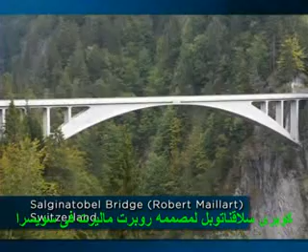Now, having said that, I should add that today's near universal use of science-based methods hasn't diminished the importance of experience in engineering design. Many of the modern era's greatest structures, for example, Robert Maillart's beautiful Salginatobel Bridge in Switzerland, used fundamentally empirical design approaches that were informed by scientific principles, but they were really guided by experience, by observation, and by experimentation.

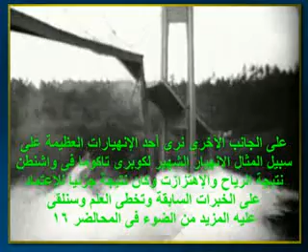And on the other hand, some of our greatest failures, for example, the infamous collapse of the Tacoma Narrows Bridge in Washington State due to wind-induced vibration, resulted, at least in part, from over-reliance on science and inadequate attention to past experience. We'll look more at this case in Lecture 16. Still, engineering as we know it today simply couldn't be performed without science.

And just as scientific principles are vitally important tools for modern engineers in practice, so these principles are also a vitally important component of this course. There are 3 reasons why it's worth your time to invest in learning the science of structures, and more specifically the science called engineering mechanics. First, science provides a sort of a shortcut to understanding.

If we wanted to learn how columns work, one approach might be to build a whole lot of columns, hundreds of columns, and then take them into the laboratory and test each one and observe how it behaves under load. Observe how differing geometry and differing materials affect the strength of those columns. And then based on all that data, try to generalize some sort of overall conclusions about how columns work. That's one approach. Or we could glean the same level of understanding from a 15-minute introduction to basic scientific principles governing column behavior. Given our short time together, I think we'll adopt the latter approach.

Second, science provides universality. As engineers of the empirical era knew well, experience really only equips us to understand structures that are more or less similar to the ones we've seen before. But an understanding of scientific principles allows us to understand and even to design any structure, even if we have no experience with that structure previously. And this is true even for the empirically designed structures of the ancient, medieval, and Renaissance eras, because the science is always there, manifested in the actual behavior of the physical structure.

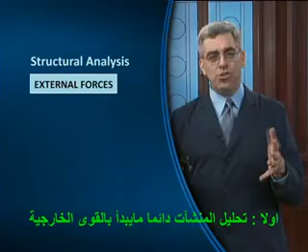Our roadmap shows the major concepts that are involved in the analysis of a structure. Let's build it a step at a time. First, structural analysis always begins with external forces. And external forces come in two flavors, loads and reactions. Let's use a physical model of the Chouteau Bridge to give these concepts a little bit more physical meaning. Here's our model of the Chouteau Bridge. And the actual railroad bridge structure experiences two principal kinds of loads. They're called dead load and live load.

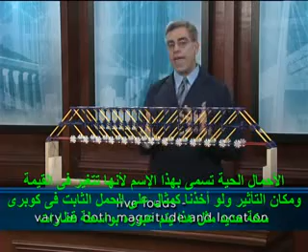Dead load is load that is permanent and unchanging, and the most important type of dead load is the self-weight of the structure, its own mass. Live loads are called live loads because they vary in both magnitude and location. So typical examples of live load for a railroad bridge like this would be the weight of heavy trains crossing the span, as well as a variety of different kinds of environmental forces. For example, when the wind blows on the side of the bridge, it exerts pressure that constitutes wind loading.

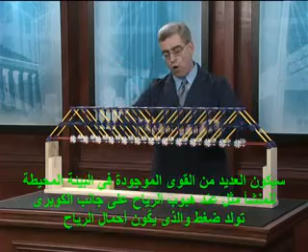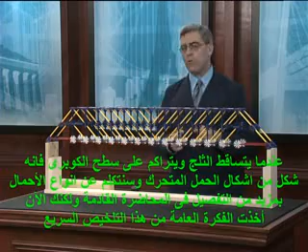When snow falls and accumulates on the deck of the bridge, it adds weight, which is another form of live load. We'll be talking about loads much more comprehensively in a later lecture, but you get the general idea from this quick summary.

Now, my physical model bridge happens to weigh 2 pounds, so that's the dead load associated with this structure. And to simulate the live load of a locomotive crossing the span, I'm going to take this steel weight, which weighs 3 pounds, and I'm going to hang it precisely in the middle of the bridge at mid-span. Okay? So those are loads.

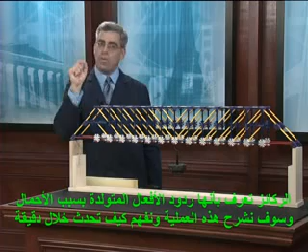The second type of external force is the reaction, and a reaction is defined as a force that's developed at a support in response to those applied loads. A support is just a physical connection between the structure and its physical surroundings, its foundations. So the supports are located right here at this point and at the equivalent point on the opposite end of the bridge. It's important to recognize that reactions are caused by loads. We're going to explore this process and understand how it happens in just a minute.

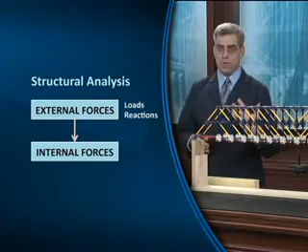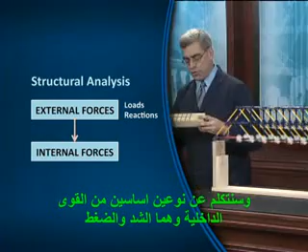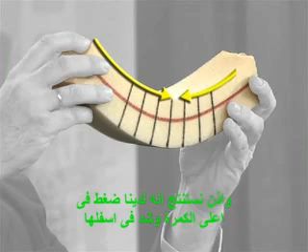What you can see, though, is that when I apply load to the bridge, it does bend downward slightly. It bends downward. It turns out that a truss is very similar to a beam. And you can see that when I bend this beam, both compression and tension are occurring within the beam. When I bend the beam, the top surface gets a little shorter, the bottom surface gets a little longer, and so we have compression in the top, tension in the bottom, which occur as a natural consequence of bending or flexure. It turns out that trusses work exactly the same way.

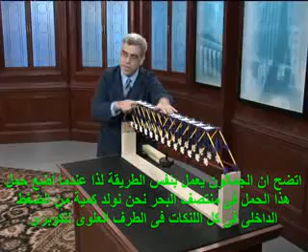So when we apply this large load out here at midspan, we're actually generating a significant amount of compressive internal force in all of the members that run along the top of the bridge, and a significant amount of tensile or tension internal force along this member that runs the entire length of the bottom of the bridge.

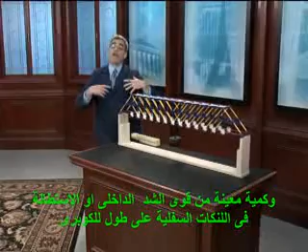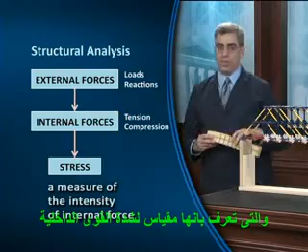Okay? Next step in our roadmap is stress, which is defined as a measure of the intensity of internal force. Stress is actually a distributed force. It's distributed over the entire cross-section of a member. And when I refer to the cross-section, I'm talking about the view of the member when you look at it from the end. So the square shape that you see here is the cross-section of the member. Stress is internal force distributed over that cross-section. So it's always expressed in terms of force per area. For example, pounds per square inch or newtons per square meter. It's really the same as a pressure, the sort of pressure that you experience when you check the pressure in the tires of your car.

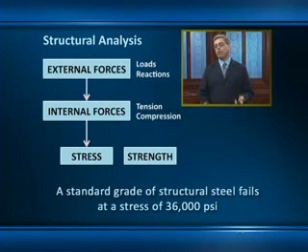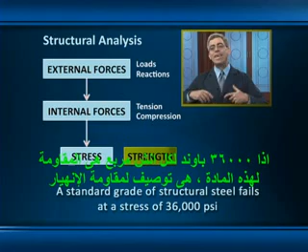Stress is a really important concept because the strength of a material is defined in terms of characteristic values of stress. For example, a standard grade of structural steel fails at a stress of 36,000 pounds per square inch, PSI. So 36,000 PSI is the strength of this material, its characteristic failure stress.

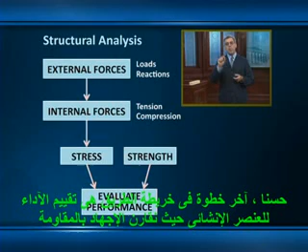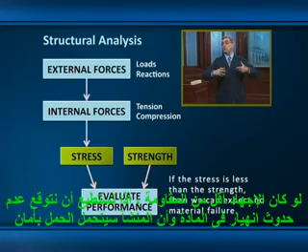Okay, so the final step in our roadmap is to evaluate the performance of the structural element by comparing stress against strength. If stress is greater than strength, then the material is going to fail. If the stress is less than the strength, then we could expect no material failure and the structure is going to be able to carry load safely. This evaluation is the ultimate goal of structural analysis. And that's our basic roadmap.

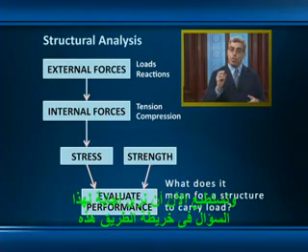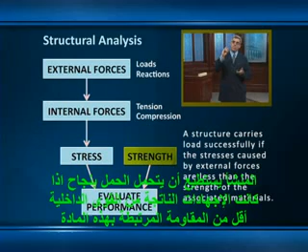And most importantly, the map equips us to answer a question that is absolutely essential to our purpose in this course. What does it mean for a structure to carry load? We can now see the answer to this question right here in the roadmap itself. A structure carries load successfully if the stresses that are caused by external forces are less than the strength of the associated material. Okay? So that's our roadmap.

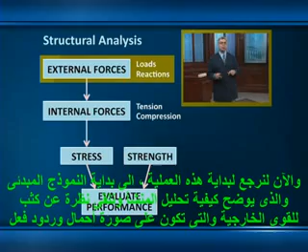Now let's return to the start of that process, the start of this conceptual model of how structural analysis is done, and take a closer look at the external forces, the loads and reactions. And to make that concept of a reaction a little bit easier to see, what I'd like to do is return to our model of the Chuteo Bridge. What we're going to do is replace the physical supports with devices that will allow us to measure the reactions directly.

Now we've replaced the supports with scales, which will allow us to directly measure the reactions. I'm going to place the bridge onto the scales. Remember that the bridge weighs 2 pounds, and as you can see from the readings on the scale, makes sense. The 2-pound bridge caused the scale to register 1 pound on one side and 1 pound on the other. Now I'm going to place that live load that was applied at midspan, and remember the live load weighs 3 pounds. And just as you might expect, when I add the 3-pound load, each of the two reactions increases by half that amount, 1.5 pounds.

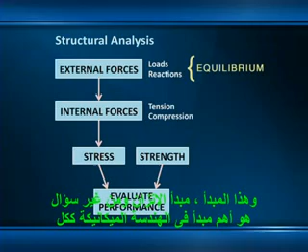So we now have a total of 2.5 pounds of reaction on this side, 2.5 pounds of reaction on the other side. And guess what? It all adds up. The total downward load is the weight of the bridge, 2 pounds, plus the additional 3-pound live load. That's a total of 5 pounds. The total upward reaction is 2.5 plus 2.5, also 5 pounds. All of the forces acting on this system are in balance, and therefore the system is said to be in equilibrium. And this principle, the principle of equilibrium, is without question the most important concept in all of engineering mechanics.

As best we know, the first person to discover and publish the principle of equilibrium, as we understand it today, was a brilliant Flemish Renaissance-era mathematician named Simon Stevin. In 1586, Stevin demonstrated this principle with an ingenious proof, which is shown here. This is a kind of a thought experiment consisting of a string of evenly spaced circular beads draped over an inclined plane. The gist of the proof is that the larger number of beads on the shallower slope exactly balances the smaller number of beads on the steeper slope. And this shows how forces in equilibrium balance each other out.

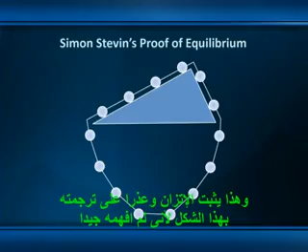Now, this particular proof really isn't critical to the course, but I just had to show it to you because someday you're going to visit the beautiful city of Bruges, Belgium. And while you're there, you're going to walk just a few blocks south of the main marketplace in the middle of town to Simon Stevin Square. Yes, there is a Simon Stevin Square in the middle of Bruges, and there you'll find this statue of the great man. And in his hand, you'll see a parchment bearing the very diagram we just talked about, the world's first proof of the principle of equilibrium. There are many beautiful things to see in Bruges, my friends, but none so beautiful as this.

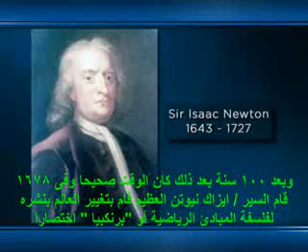Although Simon Stevin's work was groundbreaking, though, it really had little immediate impact either on the world of science or on the world of engineering, possibly because Stevin published only in Dutch, and Dutch wasn't spoken widely outside of the Low Countries, but also probably because Stevin was so far ahead of his time. 100 years later, though, the time was right. And in 1687, the great Sir Isaac Newton literally changed the world with his publication of the Mathematical Principles of Natural Philosophy, or Principia for short, one of the most influential works in the history of science.

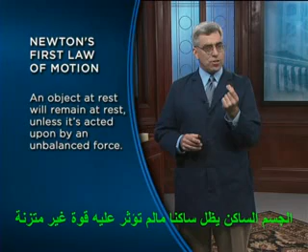Newton's Principia included his 3 laws of motion, which form the foundation of modern engineering mechanics even to this day. Over the next few lectures, we'll be using all 3 of Newton's laws to help us understand great structures. But today we want to focus on just the first law. An object at rest will remain at rest unless it's acted upon by an unbalanced force.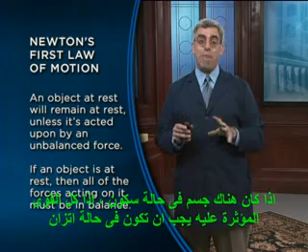Let me try stating that a little bit differently and more usefully for our purposes here. If an object is at rest, then all of the forces acting on it must be in balance. So, what does it mean for forces to be in balance? To help us explore this question, I'd like to introduce an important graphical problem-solving tool called the free body diagram.

This tool helps us guide our quantitative solutions to equilibrium problems, but perhaps more importantly, it helps us see the fundamental characteristics of the systems that we'll be analyzing. We'll be using it often throughout the course, and so what I'd ask is, as I talk through the creation of the free body diagram, you might want to consider drawing one yourself. It's a great way to experience Isaac Newton's ideas quite directly.

And to help you along, I'm going to simulate drawing a free body diagram of my Chouteau Bridge model in its current loading configuration by actually building the diagram on screen, one graphical element at a time. We'll start with the object of interest itself. That's the bridge. We isolate it from its supports. We remove the physical supports in order to cause the bridge to now become a free body. That's why it's called a free body diagram.

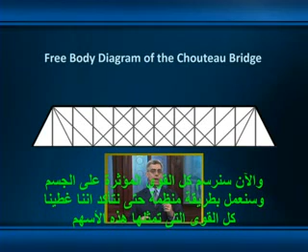Now we're going to draw all of the forces acting on the body. We're going to work systematically to ensure that all the forces are accounted for. We'll begin with the 2-pound load that's applied to the structure right there in the center in midspan. And of course, that's the dead weight of the structure, the self-weight, and so it's oriented in the downward direction. Next, we want to add the 3-pound live load corresponding to the weight of the locomotive crossing the bridge. Again, that's applied at midspan and it's oriented in the downward direction.

And as we just learned through our experiment involving placing the bridge onto the two scales, we also have two 2.5-pound reactions, and they're oriented upward out at the ends of the bridge. Now all we need to do to complete the free body diagram is to add some dimensions. The bridge is 4 feet long, and we want to show that the two loads are precisely located in midspan, so we'll show those two 2-foot dimensions.

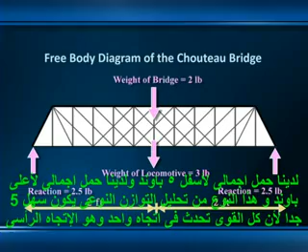Now it's pretty easy to see from this diagram that all the forces acting on the body are in fact in balance. We have a total of 5 pounds down, we have a total of 5 pounds up, and this sort of qualitative equilibrium analysis is quite simple because all the forces happen to be acting in one direction, and that's the vertical direction. But what would happen on our model of the Chouteau Bridge if the train that was crossing the bridge suddenly slammed on its brakes? That would have the effect of applying a strong horizontal load to the structure.

So when the train slams on its brakes and delivers that horizontal load, something has to prevent the bridge from sliding sideways like this. And of course, that something has to be an additional reaction that has to be developed at the supports of the structure. So clearly an additional reaction is required, and we need to show that on our free body diagram. Here's that additional 1-pound horizontal load, again applied by the train slamming on its brakes. And here's the 1-pound reaction applied at the far support in the opposite direction, counterbalancing the 1-pound applied load.

This little demonstration shows that having all forces in balance on a body means that we actually have to separately consider forces in the horizontal and vertical directions. We have to consider them independently of each other. All forces in the horizontal direction have to be in balance, and all forces in the vertical direction also have to be in balance. They're two independent conditions for equilibrium. But now what happens if the locomotive moves to some other point along the length of the bridge?

Suppose I move this 3-pound load from midspan out to, say, the 1/4 point along the length of the span. What does your intuition tell you about how the reactions are going to change in response to that change in the position of the load? I won't change the magnitude, just the position. What does your intuition tell you? Will the reactions change? If so, will they get larger? Will they get smaller? What do you think?

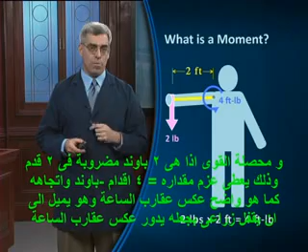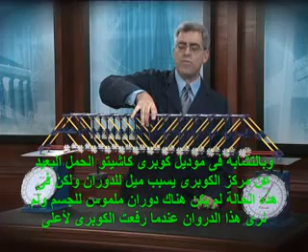Similarly, in our Chouteau Bridge model, the off-center load was causing a tendency to rotate, but in that case, there actually was no rotation, no physical rotation of the body. We did see that rotation when I lifted it up, but when it's in place, the supports prevent the rotation from happening. When we moved the load, the reactions changed. What happened was these new reactions created a counterbalancing moment that prevented the bridge from rotating.

And so what we can see from this example is that there's actually another condition for equilibrium, an additional implication of Newton's first law, if you will. Not only must all horizontal and vertical forces on the body be in balance, but all moments must be in balance as well. That situation is described mathematically here on this slide. And if this notation is unfamiliar, recognize that it's really just a shorthand, efficient way of describing the balance of forces for an object that happens to be in equilibrium.

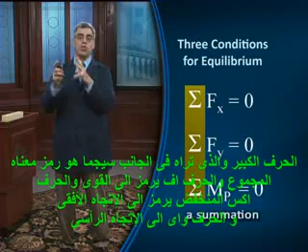The Greek letter sigma that you see on the left-hand side is really just a symbol that means a summation. The letter F refers to forces. The subscript X refers to the horizontal direction. Y refers to the vertical. M refers to moments, and the subscript P refers to the moment about any point on the body.

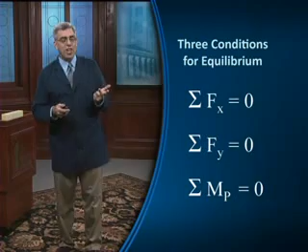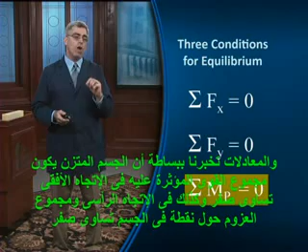And so what the equations tell us is simply that if a body's in equilibrium, the sum of all forces acting on the body equals 0 in the X direction. The sum of all forces acting on the body in the Y direction equals 0. And the sum of all moments about any point on or off the body also must equal 0. All three of these equations must be true if the body's in equilibrium. Let's see how this amazingly powerful set of equations can be used to predict the response of a structure to load.

And let's use the specific example of our model of the Chouteau Bridge. Let's assume for the moment that those two reactions that we just saw on the scale are currently unknown. Can we use the principle of equilibrium to actually calculate what those reactions should be? Well, let's give it a try.

We'll start our solution by following through with the process that we always do when we solve an equilibrium problem. In this case, all we really have to do is modify our existing free body diagram, shifting the load to show its new off-center location at the 1/4 point along the length of the span. We've also now shown the reactions as unknown quantities, R sub L, that's the reaction on the left-hand side, and R sub R, the reaction on the right-hand side.

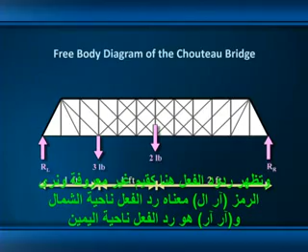With this free body diagram complete, we're now ready to investigate the balance of forces using our three equilibrium equations. And as we do this, I suggest that you think of the equations as a bookkeeping tool that really just helps us keep track of forces and moments. It's really nothing more. In this particular analysis, we don't even need to use one of the three equations, the sum of forces in the X direction, because there are no forces on the body in the X direction.

So we can start our solution by writing equilibrium equations for the sum of forces in the Y direction. We do that summation systematically, working from left to right. We start by showing the sum of forces in the Y direction equals 0. We assume that upward is the positive direction. And here's that equilibrium equation. All we did was account for each force. RL, the reaction at the left-hand end, is upward, so it's shown as positive. The 3-pound and 2-pound loads are in the downward direction, so they're shown as negative. And the unknown reaction on the right-hand side is also upward.

We can do a little bit of algebra and determine, just by doing some algebraic manipulation, that the sum of those two reactions must be equal to 5 pounds. And in fact, that makes perfect sense. It's exactly what we saw in the physical model. No matter where we move the load, the reactions added up to 5 pounds.

Now we have to use our third equilibrium equation, the moment equation, to attempt to actually calculate the values of those reactions. If the body's in equilibrium, then the sum of all moments acting on it about any point has to be 0. We can select any convenient point to use as the basis for this calculation, and so we're going to use the left-hand end, annotated as point P on my free body diagram.

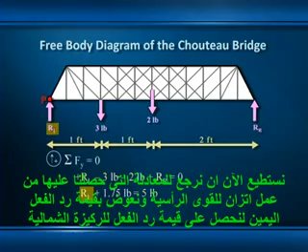And when we apply the algebra to calculate the results, we find that the right-hand reaction works out to be 1.75 pounds. We can now return to our equilibrium equation for the sum of forces in the y direction, substitute that value back into the variable for the right-hand reaction, and solve for the unknown force in the left-hand reaction, and that turns out to be 3.25 pounds.

And to quote Archimedes, eureka! This is exactly what we see in our two scales. So in case you had any doubts, the principle of equilibrium actually works. Congratulations on having completed what very well may be your very first quantitative solution to an engineering problem. I hope you're beginning to see that the quantitative application of scientific principles can help us see structure in new and exciting ways.

In this lecture, we developed a roadmap that depicts how a structure is analyzed. And we focused on that first step in the roadmap. Next lecture, we'll visit all of the remaining destinations on the roadmap of how to analyze a structure, and we'll see that the principle of equilibrium that we just talked about also has important implications beyond external forces. In doing this, we'll equip ourselves with all the tools we need to see and understand structure in the world's greatest buildings, bridges, and towers.